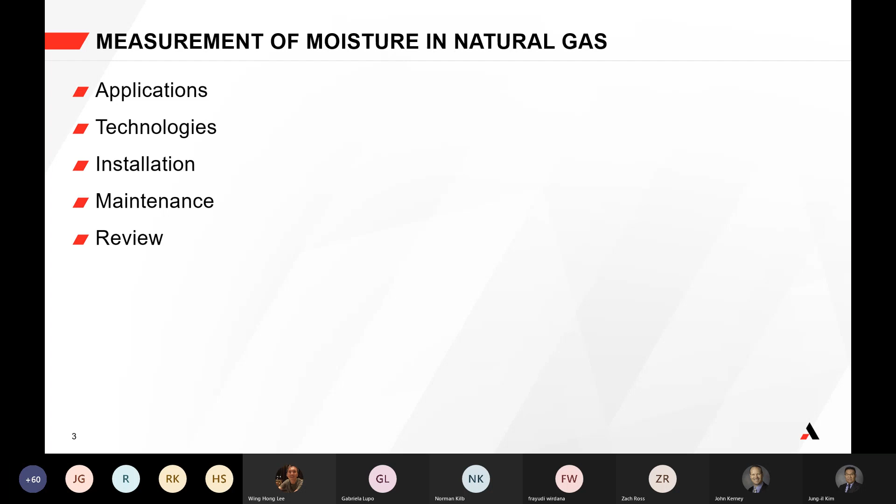Water is an unavoidable impurity of natural gas. If you think about it, water is everywhere on Earth. About 71% of the Earth's surface is covered by water. Water also exists in the air as water vapor, in the ground as soil moisture, and even in our body.

In the natural gas system, water is a diluent that reduces the heat value of the gas. In other words, it dilutes the gas. Water acts as a solvent of other impurities like H2S and CO2 to form corrosive acids.

Natural gas hydrates is formed when methane molecules, the primary component of the natural gas, are trapped in a microscopic cage of water molecule under certain pressure and temperature conditions. Natural gas hydrate can form within gas pipeline as a solid or semi-solid mass that can slow or completely block gas flow.

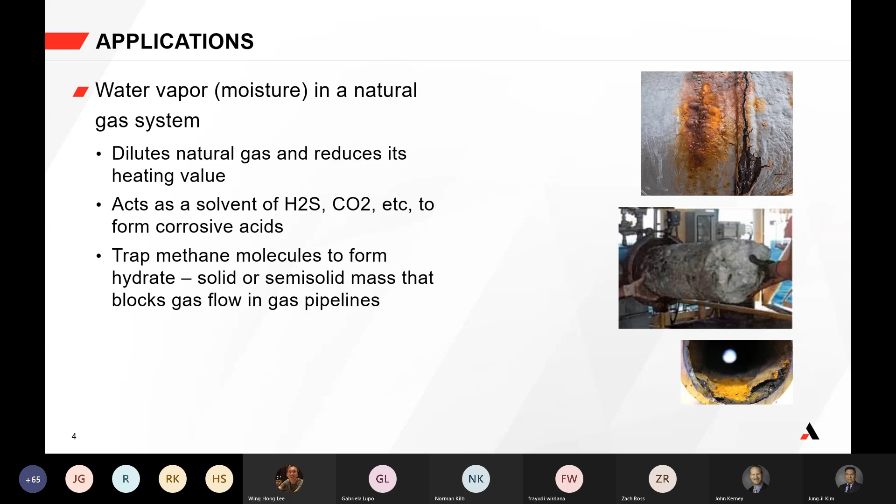Raw natural gas is a mixture of hydrocarbons, mainly methane, ethane, propane, butane, and pentanes. Its makeup is dependent on its source. In addition, raw natural gas contains water vapor, hydrogen sulfide, carbon dioxide, helium, nitrogen, and other compounds classified as impurities.

Natural gas processing consists of separating all of the various hydrocarbons and fluids from the pure natural gas to produce what is known as pipeline quality natural gas. Major transportation pipelines usually impose restrictions on the makeup of natural gas that is allowed in the pipeline. That means that before natural gas can be transported, it must be purified.

The ethane, propane, butane, and pentanes removed from natural gas, known as natural gas liquids or NGLs, are sold separately and have a variety of different uses, including providing raw material for oil refineries or chemical plants.

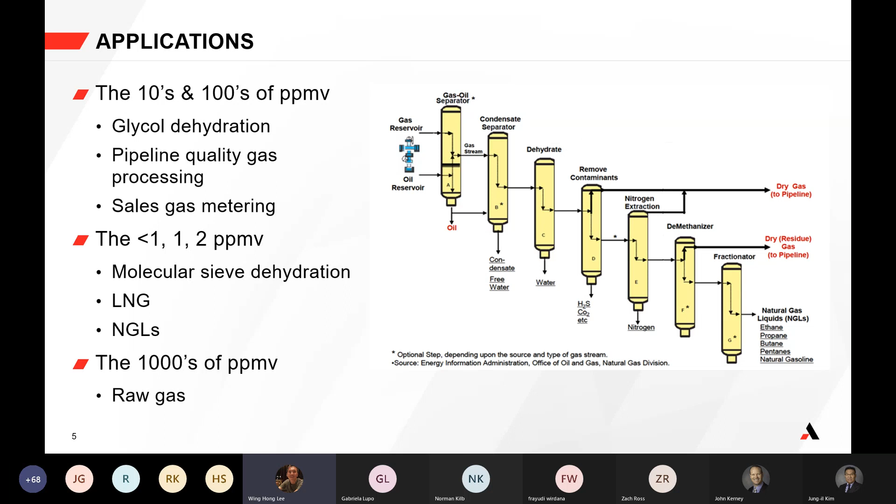A little bit of history on the development of moisture measurement technology.

Manual chilled mirror instruments were the very first widely used process moisture monitors. The operator reads the temperature at the time we see the dew first form on the mirror.

However, dried natural gas can present a challenge to this instrument, depending on the natural gas composition, as you can have a situation where the processed gas liquefies before the water vapor condenses.

Aluminium oxide sensors first came into the picture in the 1950s. Quartz crystal, or QCM sensors, were developed in the mid-60s by ESSO R&D, later purchased by DuPont, and were first used to monitor moisture in catalytic reformers' hydrogen recycle gas.

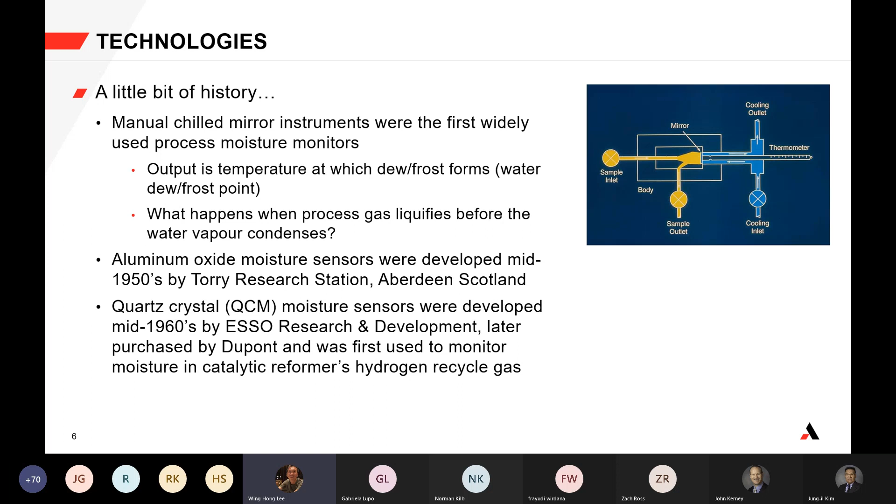Laser-based or TDL moisture analyzers were developed in the mid-80s by Bell Labs, first used to monitor semiconductor production gases.

As electronic sensors gradually replaced chilled mirror instruments in the 60s and 70s, most process analyzers were programmed to permit them to display dew point like the previous analyzer. Although none actually monitor that property, volume concentration of water is the data of interest.

For example, as an impurity in natural gas supply, only the volume of water a dryer can absorb before it needs to be regenerated matters.

These are the most commonly used technologies for moisture measurement in natural gas, but there are others that we will not cover today, including P2O5 and stain tubes.

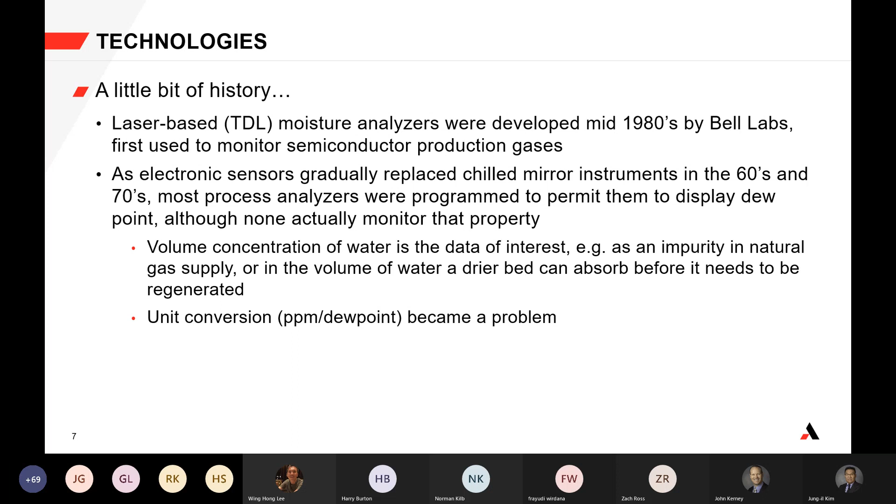The quartz crystal moisture sensor is also known as QCM or quartz crystal microbalance.

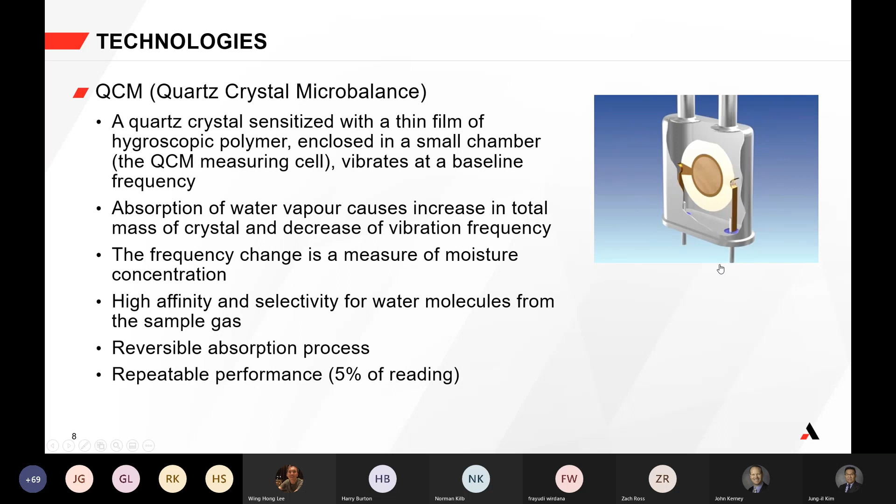A quartz crystal is sensitized with a thin film of hygroscopic polymer, which readily absorbs moisture and is enclosed in a small chamber. The assembly forms the QCM measuring cell, as shown in the picture.

The quartz crystal is energized to vibrate at a baseline frequency. Absorption of water vapor by the polymer causes an increase in total mass of the crystal, which decreases the vibration frequency. The frequency change is the measurement of the moisture concentration.

The hygroscopic film has high selectivity for water molecules, and the absorption process is reversible. This performance is repeatable within 5% of reading.

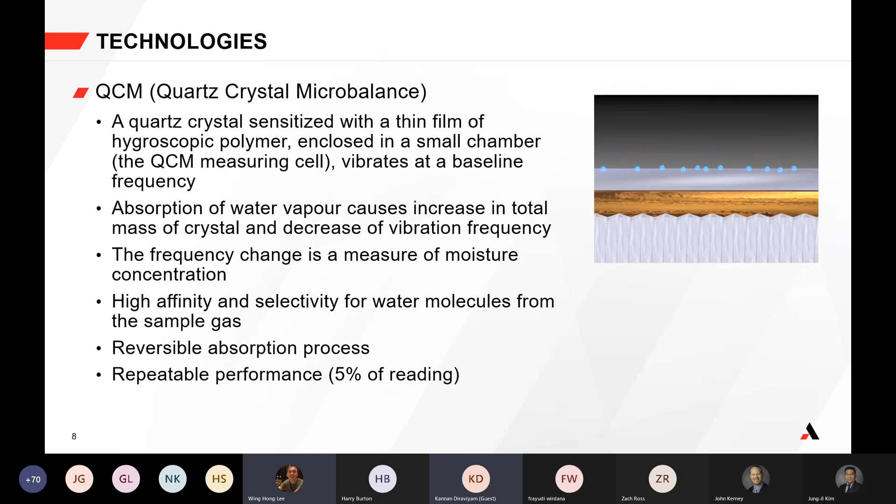Operation of the system: the basic sampling system is based on a sequence of fixed intervals between a dry or reference cycle and a wet or sample cycle.

The QCM is extremely sensitive, capable of ppb level detection of moisture in a natural gas stream.

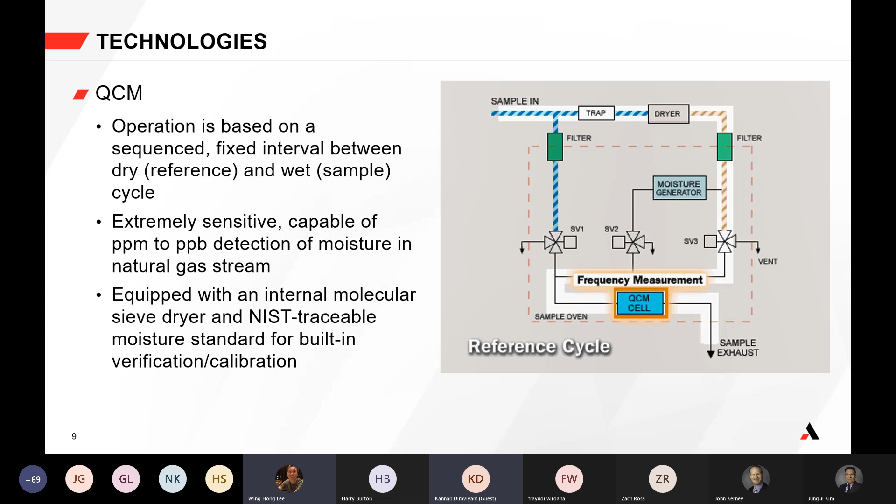The sampling system is equipped with an internal molecular sieve dryer and a traceable moisture standard. The dryer provides zero reference for the dry cycle, and the combination of the dryer and the moisture generator provides the built-in verification calibration function. The system provides an accuracy of 10% of reading.

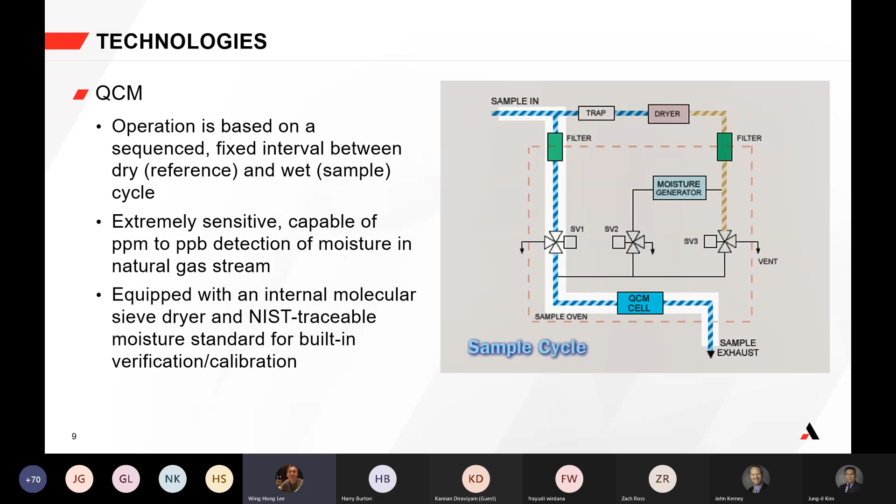The quartz crystal sensor, which is the size of a coin, together with a similar but sealed quartz crystal to serve as the reference oscillator, are located in an oven maintained at 60 degrees Celsius.

With an extractive sample system, the temperature, pressure, and sample flow rates are controlled, resulting in more accurate moisture measurement. The system provides a measurement accuracy of 10% of reading.

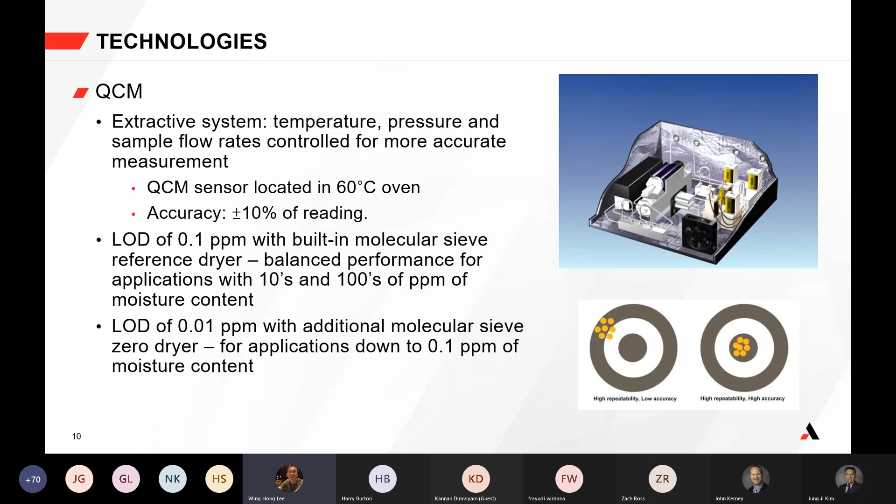With a reference dryer, the limit of detection is 0.1 ppm, a good balance of performance for applications with moisture levels of 10 to hundreds of ppm. With an additional zero dryer, the limit of detection is 0.01 ppm for applications down to 0.1 ppm of moisture content.

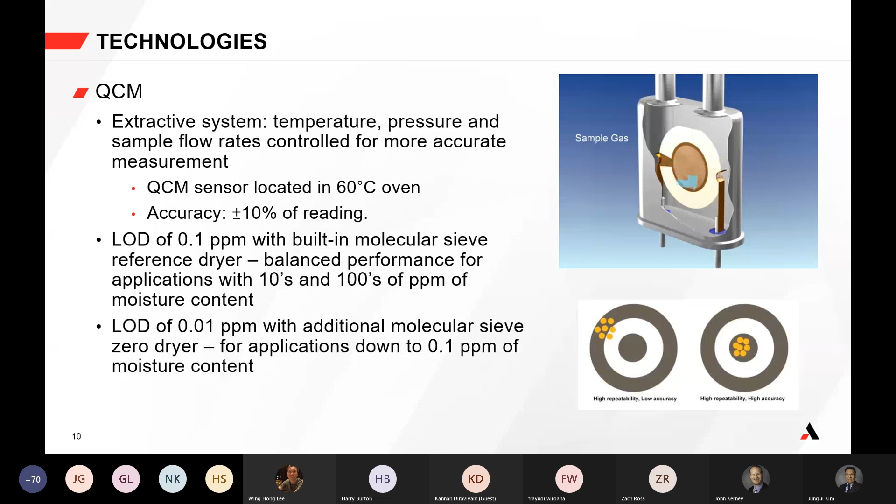TDL, or tunable diode laser, also known as TDLAS or tunable diode laser analyzer system, is an absorption spectroscopic technique. The light wavelength emitted by a laser diode has an extremely narrow bandwidth and is dependent on its temperature and the voltage applied. The temperature is kept constant and the voltage to the diode is adjusted or tuned to let it emit a narrow bandwidth of light at the wavelength that is absorbed by the gas of interest.

In this case, we're discussing moisture.

The light energy is passed through the sample gas, and a certain amount of it is absorbed by the water in the light path. The amount of energy absorbed, seen as energy lost by the photodiode, is related to the concentration of water in the sample gas.

The line locking of the laser output wavelength is controlled by the feedback of the same light wavelength passed through a sealed reference containing the gas of interest, in this case water vapor. However, line locking is not available in most TDL analyzers in the market.

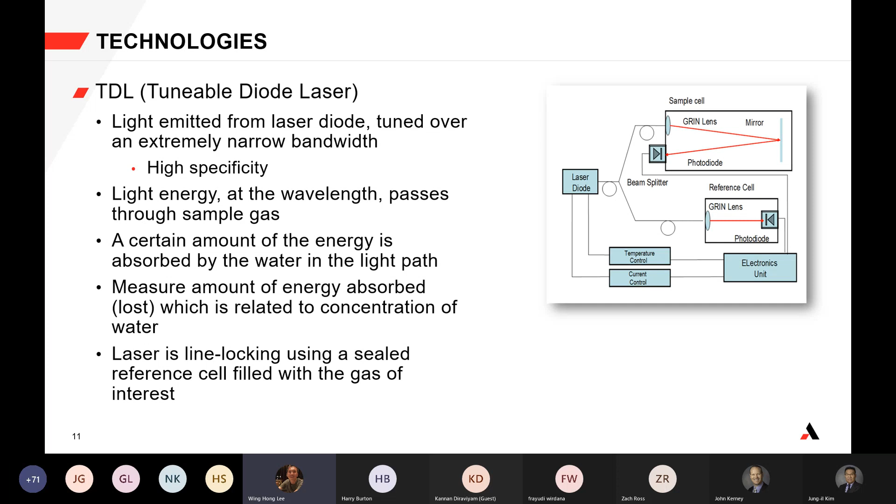Being a non-contact measurement technique using light, TDL is immune to contamination, has a very fast response time, and has very long-term stable calibration.

Laser wavelength for measuring other gases like CO2 and H2S are also available. A dual-cell, dual-laser analyzer provides measurement of more than one gas type using one analyzer. In natural gas applications, a dual application we have seen more often is a combined moisture and CO2 measurement. The dual can also be configured to measure moisture content of two different gas streams.

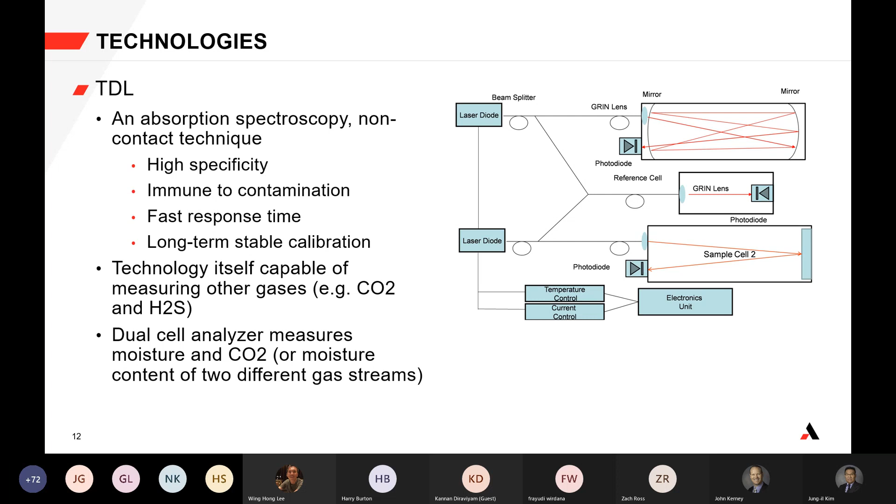Accuracy and repeatability is 2% of reading, and limit of detection is 4 ppm. This technology is suitable for applications with tens to hundreds of ppm of moisture content.

Heating the measuring cell up to 150 degrees Celsius by enclosing it in an oven enables it to be used in applications with high dew point like raw natural gas, by keeping the sample in vapor phase.

A third technology that's also used in this application is aluminum oxide. It uses an impedance or capacitance sensor. It is a multi-channel system, and so you can achieve a low cost per stream of measurement.

It can measure moisture in non-aqueous liquids. Its measurement principle is based on partial pressure, and hence requires compensation for any difference between sample pressure and process pressure.

The biggest concerns associated with the aluminum oxide are its inherently low accuracy and its reliability. AMETEK does not offer this technology.

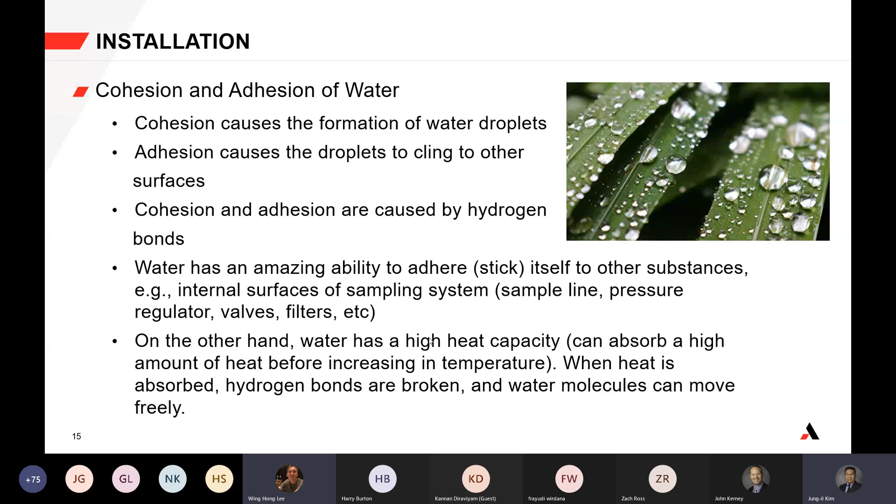The fastest wet-up tubing was the one that had the smoothest surface, meaning the least internal surface area, since during wet-up, the internal surfaces get populated with moisture before the actual moisture reaches the analyzer.

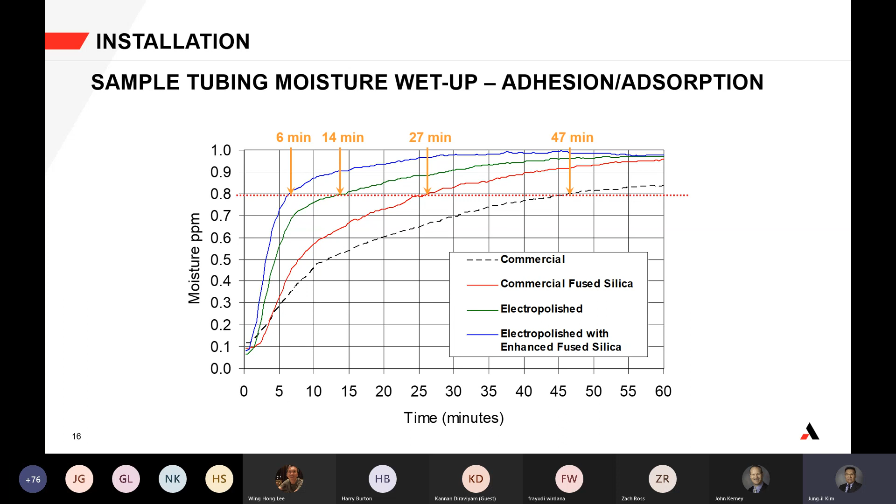This slide shows another test done by O'Brien that shows moisture dry down of various grades of sample lines. Electropolish with fused silica had the fastest dry down time.

Next was electropolished, followed by commercial grade with fused silica. The longest dry down time was regular commercial grade tubing.

The fastest dry down tubing was the one that has the smoothest surface, meaning the least internal surface area, since during dry down, the moisture on the internal surfaces has to be removed before dry gas reaches the analyzer.

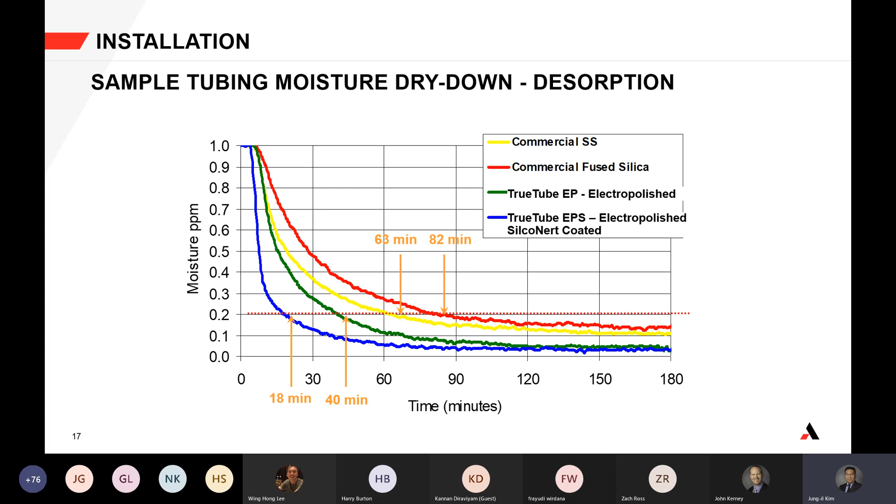The best practices in designing sample systems are minimizing the sample system by reducing the internal surfaces. This can be achieved by shortening the distance between sample probe and analyzer, making the sampling system smaller and fewer by using necessary components and reducing the number of fittings.

The speed of response of the sample system is greatly dependent on the sample gas consumption, or the flow rate through the sample system. So increasing the speed of response can mean wasting more sample gas.

Heated sample lines mean the sample gas is less susceptible to ambient temperatures, reducing the possibility of moisture sticking to the internal surfaces. Tests have shown that the optimum temperature to maintain for moisture is 60 degrees C. Any further increase is just wasted energy.

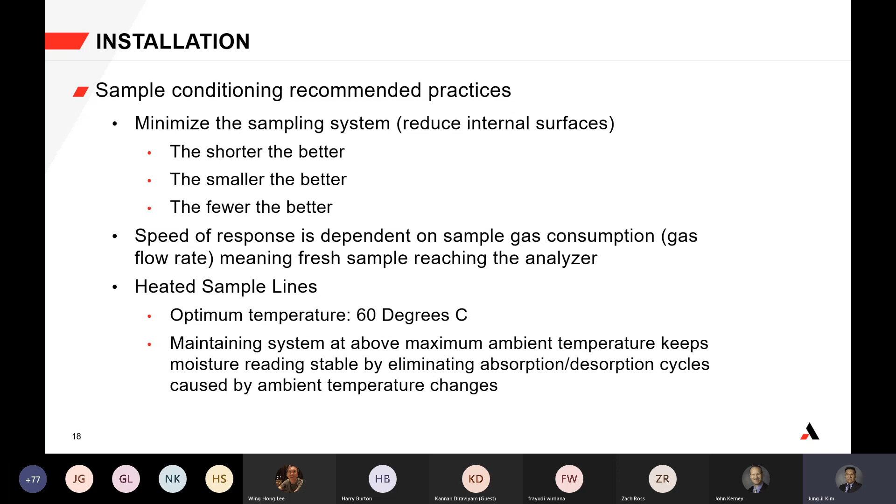As previously stated, sample line length should be as short as possible. We are often asked, what is the maximum line length an analyzer can handle? There is no maximum sample length. As the sample line length increases, the internal surfaces increase, and more heating is required to keep the sample system heated. And of course, the speed of response decreases.

This means that it is best to locate the analyzer and the sample system as close to the sample takeoff point as possible.

Using a small diameter sample line reduces the internal volume, thus increasing the speed of response. A 1/8-inch line typically has 7.8 times less volume than a 1/4-inch sample line.

Using electropolished tubing means a smoother internal surface, which reduces the surface area water molecules can adhere to.

Gas is compressible, so higher pressure means more gas molecules in the sampling system. More gas molecules in the system is equivalent to a larger internal volume. So pressure reduction should be done as close to the sample probe as possible.

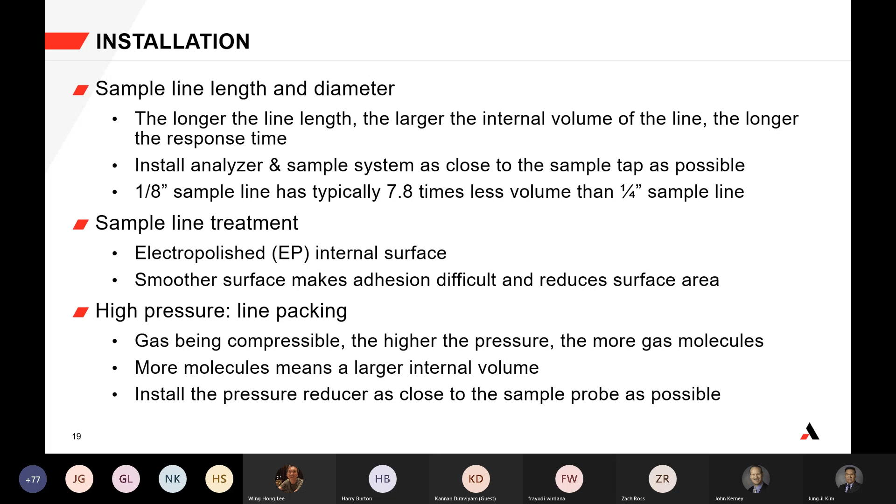Paramount when designing a sample system is to eliminate dead legs. Dead legs are unpurged volume that can be purged before sample analysis, or volume that cannot be purged. Dead legs that cannot be purged should be avoided.

Dead legs will accumulate moisture and release moisture, especially due to turbulence in the sampling system caused by changes in pressure and/or flow.

Sampling components such as probes and filters take 3 times their internal volume of sample flow for it to be adequately flushed before a representative sample reaches the analyzer.

Also, components like pressure gauges are a dead leg. So limiting the sampling system to only critical components is especially important for low ppm moisture measurement.

Unions, tees, reducers, and any other similar components add to the total internal surface area and increase points of leak. So their usage should be limited.

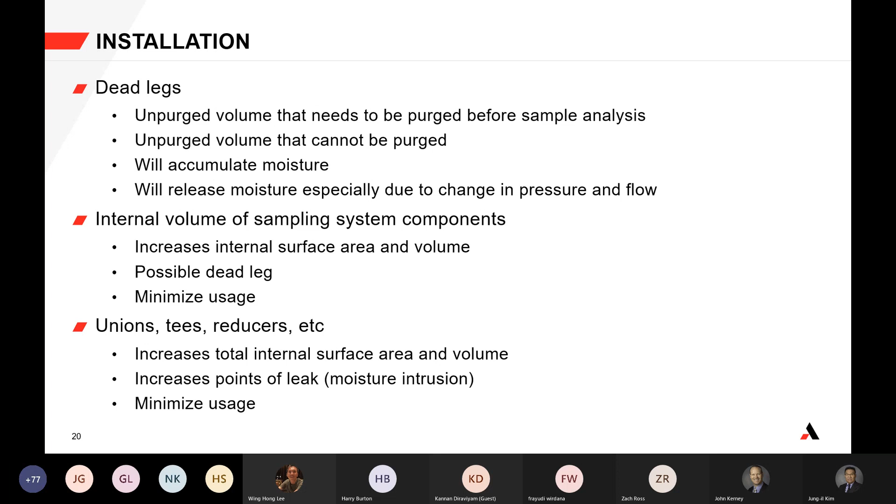Do not use needle valves or rotameters upstream of the analyzer. Those components restrict flow and cause a pressure drop. Depending on the components, they can cause a dead leg and/or be a source of moisture intrusion.

In order to increase speed of response by increasing overall sample gas consumption, installing a bypass flow right at the inlet of the analyzer is recommended. This bypass leg can also be used to troubleshoot higher than expected moisture readings.

Moisture reading decreasing when increasing bypass flow means that moisture is added by the sample system. Moisture reading increasing when decreasing bypass flow means moisture is added by the sampling system. So this is a very good way for debugging higher than expected readings.

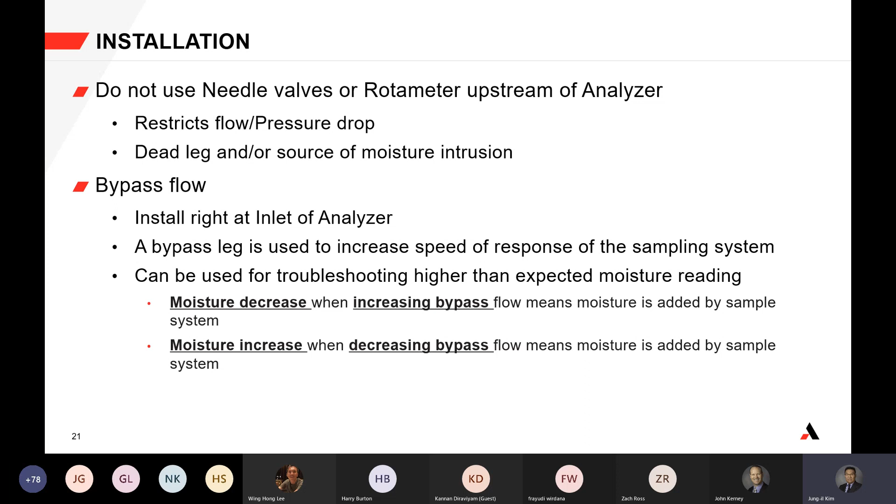For maintenance, if necessary, zeroing of the analyzer should be adjusted with dried sample gas to give the best results, which also takes the background gas into consideration. An osmotic dryer can be used to dry down the gas.

Moisture span validation is more challenging. Bottle standards are convenient and are always used for impurities other than moisture. Due to the cohesion and adhesion properties of moisture, the use of bottle standards should be avoided.

In a moisture standard bottle, the water molecules will stick to the internal surfaces of the bottle, pressure regulator, and all other components of the delivery system.

Also, heat frees up stuck water molecules. So the moisture content of the standard gas is greatly affected by the ambient temperature conditions where the validation is being carried out.

Therefore, it is best to use bottled moisture standard for sanity checks and not for actual calibration of the analyzer.

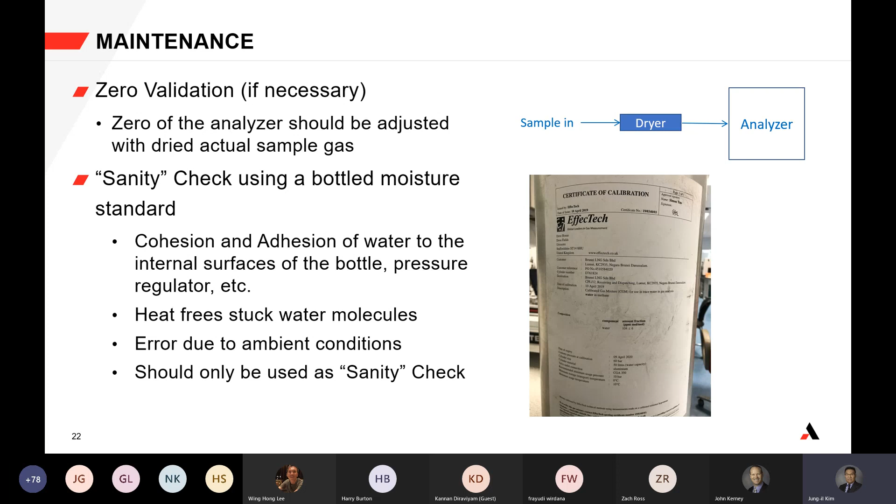As discussed earlier, the QCM analyzer is equipped with an internal mole sieve dryer and a NIST traceable moisture generator to support the analyzer, providing 10% accuracy. The verification calibration feature can be executed at any time and set to automatically calibrate on a regular basis.

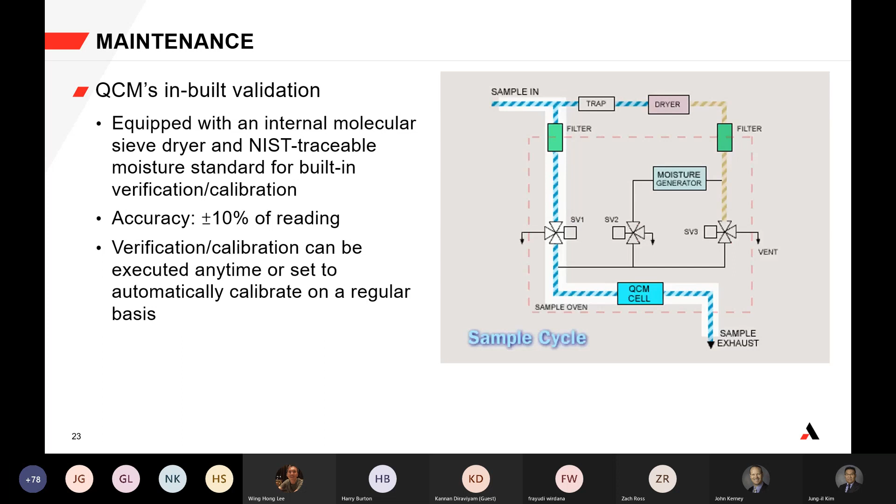Jung-il, can I interrupt for a minute? There's a couple of questions.

The first question that came in was: does the outlet of the analyzer need to be at atmospheric pressure? And if that is the case, would having a needle valve after the analyzer be a problem? Okay, one thing is, first of all, I don't see why a needle valve is required at the outlet of the analyzer. I don't see any reason for it.

Second, if you were to put a needle valve at the outlet of the analyzer, what it would do is create back pressure. Whether the analyzer can handle back pressure and how it handles it is dependent on the different technologies. For example, QCM analyzers are designed to be vented to atmosphere, but due to hazard conditions where the analyzer has to vent to a flare that is pressurized, we don't want back pressure or junk in the exhaust system going into the analyzer. So you have the option to put a back pressure regulator that can be set at 15 PSI. When a back pressure regulator is installed, there is back pressure compensation, so the reading compensates for the back pressure.

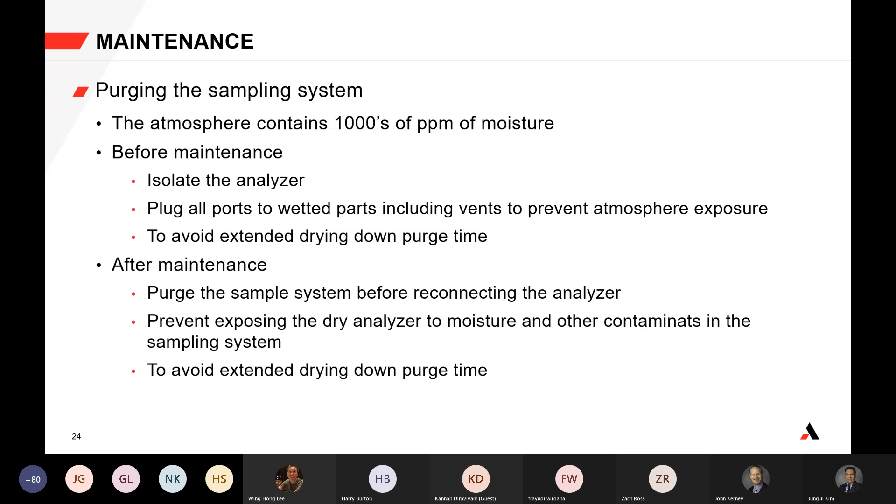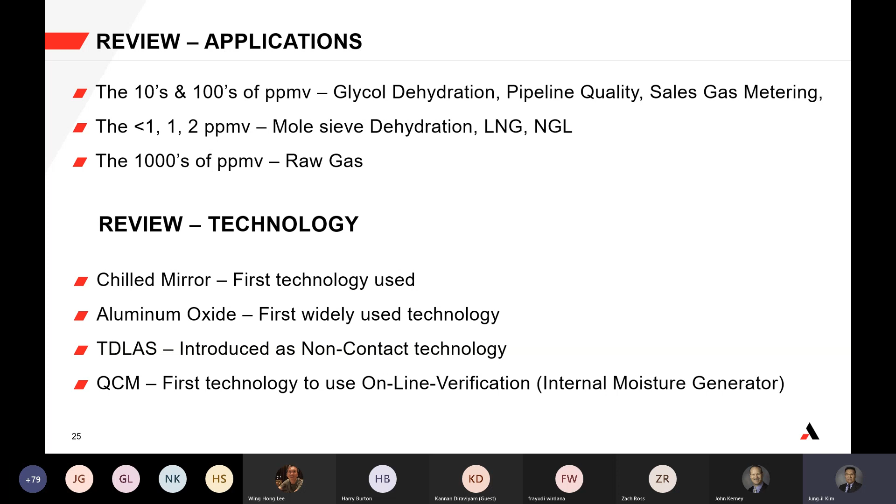Technology-wise, we covered chilled mirror, which was the first technology available or used for measuring moisture. Aluminum oxide, which was the first widely used technology. TDLAS, introduced as the non-contact technology. And QCM, the first technology to use online verification with an internal moisture generator.

Installation-wise, it's best to keep the sample line as short as possible. Use eighth-inch tubing instead of quarter-inch tubing, electropolished, heated to 60 degrees C, with components and fittings minimized.

Do not use needle valves or rotameters upstream or downstream of most analyzers. Pressure reduction is best done as close to the sample probe as possible, which reduces the amount of sample volume that needs to be consumed. Then install a bypass to increase the speed of response.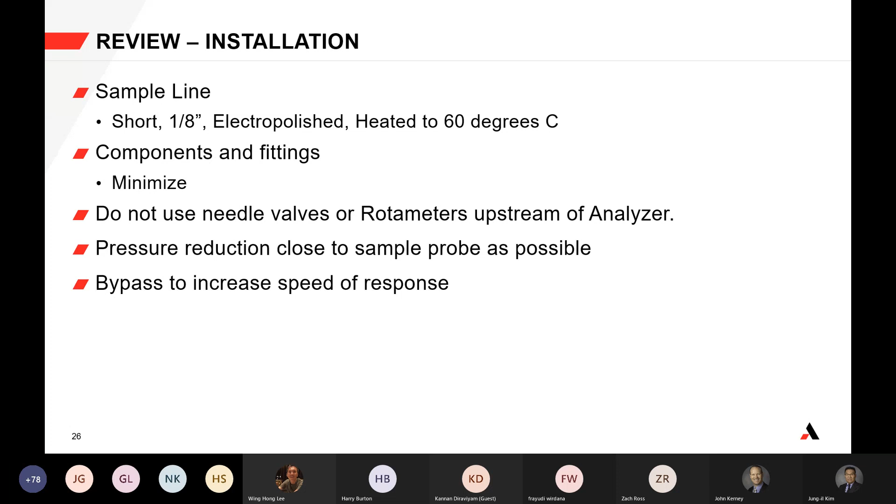And zero validation when necessary using zero gas, making sure you know the quality of the zero gas you are using if you are planning not to use a dryer. Also using a bottled moisture standard more as a sanity check than something to actually calibrate your analyzer with.

Isolate the analyzer by plugging all ports and vents, and purge the sample system before connecting the analyzer. I've seen a lot of cases where after maintenance, they purge the sample system with the analyzer connected, which introduces moisture and other contaminants depending on the maintenance done and how long it took, sometimes requiring replacement of a lot of the wetted surfaces.